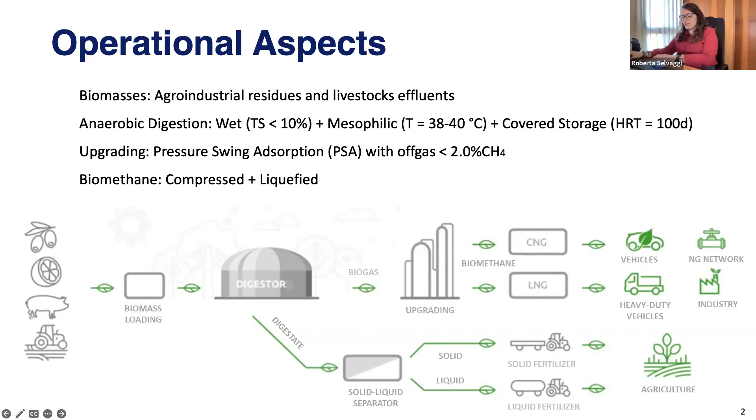So the peculiarity, the most important aspect of the Assoro Biometano plant is the diet. In our case, we don't use waste, and there is no land taken away from food or feed production. Our plant is fed only with local agro-industrial residues. And we use, for example, orange pulps, or as I show you on the screen, orange peelings obtained from orange juice production. And we also use olive pomace and wastewater obtained from the production of olive oil.

And then we also use livestock effluents, coming from poultry or chicken livestock or from pig farms. So our biomasses arrive from a radius smaller than 50 kilometers, more or less. So we can speak of a local chain. When we selected these biomasses, we had two missions.

First of all, we chose sustainable biomasses for the production of advanced biofuels in order to be in line with the European ILUC directive and Annex 9. So we respect the chain of food as first, feed as second, and energy as the last step of the chain. And the second aim was to choose something highly energetic that allows us to produce a high quality digestate with a strong and full potential of fertilization.

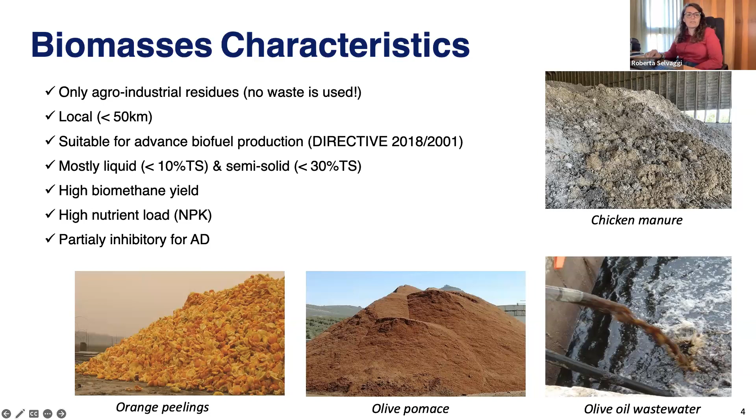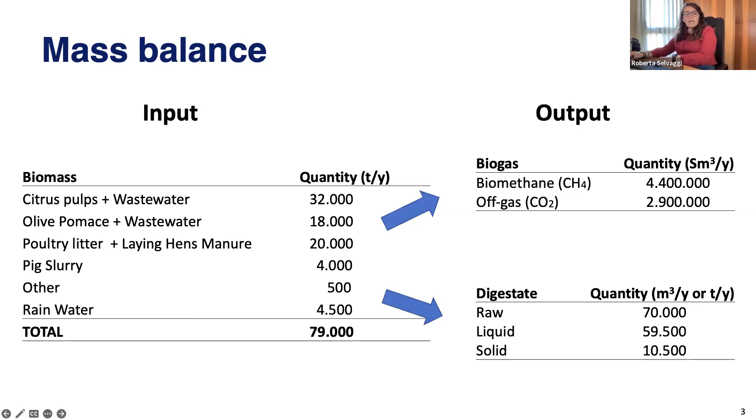So, as I already showed you, Assoro Biometano yields around 4.4 million standard cubic meters of biomethane per year. And moreover, the sales chain is also very local, like the biomass chain, because all the customers are placed within a radius smaller than 100 kilometers from our site. So again, our peculiarity is working local.

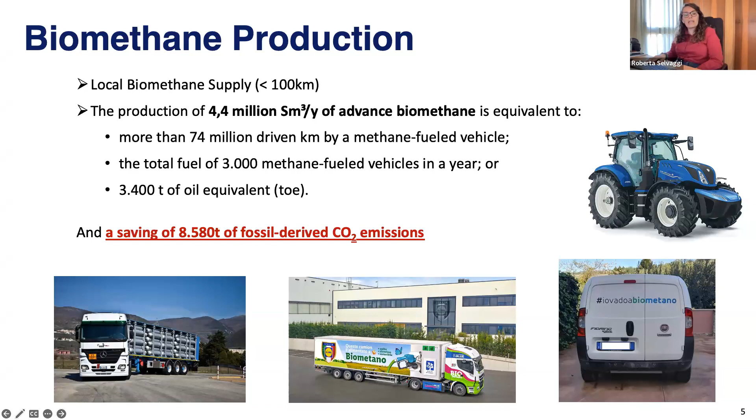With this quantity of natural gas, it is possible to travel 74 million kilometers with a household methane-fueled vehicle. And most important of all, we are saving more or less 8,600 tons of carbon emissions from fossil fuel. In other words, Assoro Biometano is yielding benefits both for the economy of the whole region and for the sustainability of the transport chain.

This is a solution with a high efficiency of distribution, because in 8 hours of work, we can spread 1,000 tons of digestate. So with this system, we spread digestate on about 50 hectares in more or less 4 days. So it is important for us.

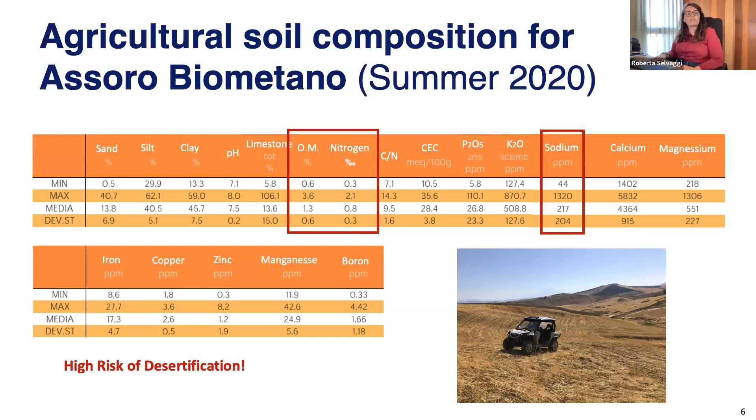And it's not all about numbers, because in addition, our digestate allowed us to reduce the need for synthetic fertilizer, to avoid the problem of odor emission when compared with effluents, and reduce the potential pathogenic content of livestock effluents. By increasing the humidity of our soil, we can also reduce the water need for irrigation.

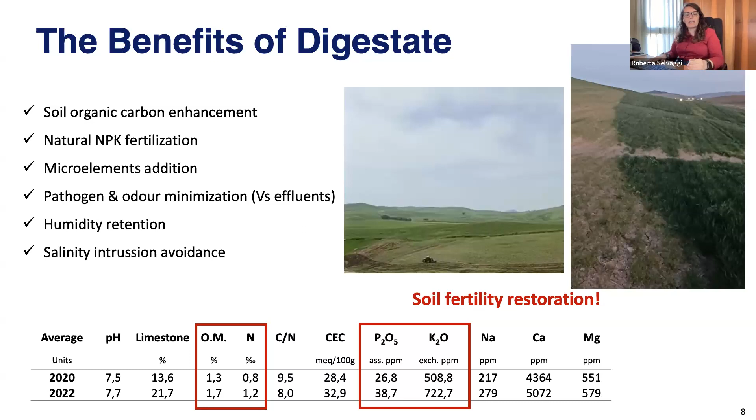So with all this, we can conclude that Assoro Biometano is working to stop the desertification process of the whole Dittaino Valley, with a strong contribution to the sustainability of the whole region.

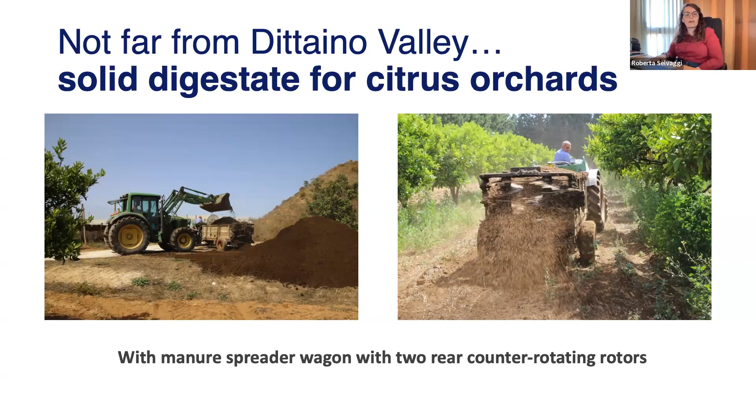So as you can see in this photograph, with the support of the University of Catania and other local stakeholders, we are doing distribution tests on citrus orchards, adapting a manure spreader. These are photographs of our experimental activities. And we are trying to find some solutions also for vineyards.

We are working on perennial crops with a high level of income, because we hope they are able and willing to pay for digestate as a product and for its transport cost. So we are testing different solutions, also to measure the efficiency of different distribution approaches.

But last but not least, I want to share with you only 2 pitches about a new research activity, the Fertimed project. Assoro Biometano is not directly involved in this project, but I'm the innovation broker of the operational group working on this project, and I would like to show you our experience. Fertimed is a Sicilian project financially supported by the Sicilia Rural Development Program, inside a measure for cooperation between private and public companies to develop innovative solutions to agricultural issues.

Fertimed involves 8 partners, 6 farms and 2 institutional teams, and they constituted an operational group named Digestato, which in Italian means digestate, with the aim to evaluate technical and economic solutions for using an innovative kind of digestate, the microfiltered digestate. And this is the rationale of the Fertimed project.

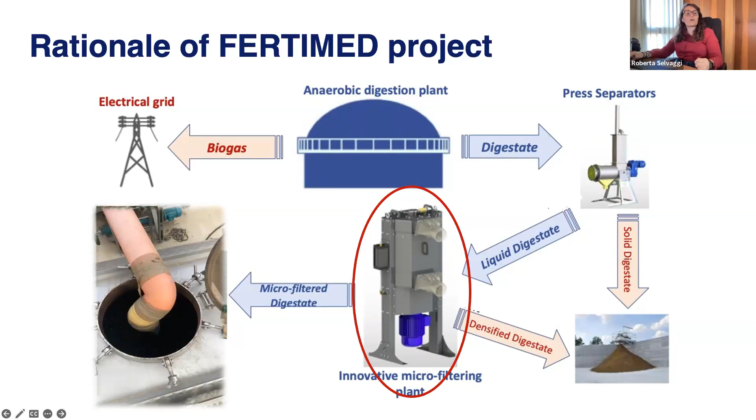The chain to produce digestate is as usual. We always have the same phases as an ordinary plant, but the innovative section is the microfiltering unit. We produce microfiltered digestate starting from the liquid fraction of the digestate. And we are using an innovative plant by VAM Sepcom, installed in a digestion plant in the province of Ragusa in Sicily. So it's another plant, not Assoro Biomethane's plant.

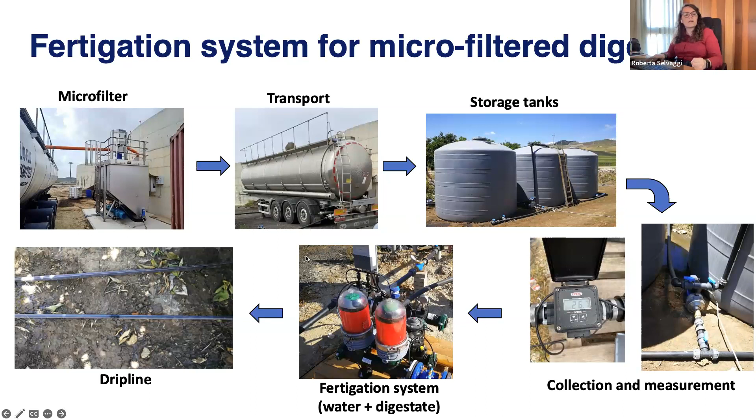Then, after production, we transport the microfiltered digestate to the partners' farms and use it in a fertigation system. After storage, we mix water and digestate in a ratio of 1 unit of digestate to 15 units of water, and use this mix in drip lines. These are photographs of our experimental fields, where we installed all these units to set up the process.

As I said before, we are trying microfiltered digestate on perennial crops typical of the Mediterranean area. So we are trying it on citrus orchards and opuntia fields, grassland. But we want to produce cladodes as biomass for the digester.

So finally, I would like to say that our mission, our company, closes the circular chain of the agricultural economy. For example, we use citrus pulps to produce biogas and digestate. We use digestate to produce citrus fruits, then obtain juice, and then citrus pulps to start the cycle again. And the same is for the opuntia: we use digestate to produce cladodes, to produce biomass for digesters. So we are a concrete example of circular economy.

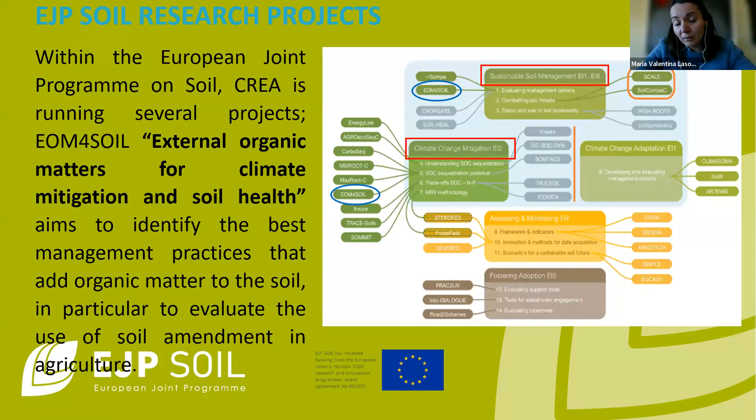In particular, today I'm talking about a new project to evaluate soil amendment in agriculture. Within the European Joint Programme on Soil, CREA is running, as you can see from the picture, several projects. In particular, today I'm talking about EOM4Soil, external organic matter for climate mitigation and soil health, which aim is to evaluate the best management practices to add organic matter to the soil, in particular to evaluate the use of soil amendments like digestate, biochar, or compost in agricultural systems.

This is the context where we are running this project. We need to consider that at European level, there are many activities which generate organic waste, so urban, industrial, agricultural activities, and the annual production of bio-waste at European level is estimated to be 1.6 billion tons, which can be divided between 61% waste produced by animal breeding, 25% originated from plant residues, a small part, 7%, industrial waste, and another 7% municipal waste.

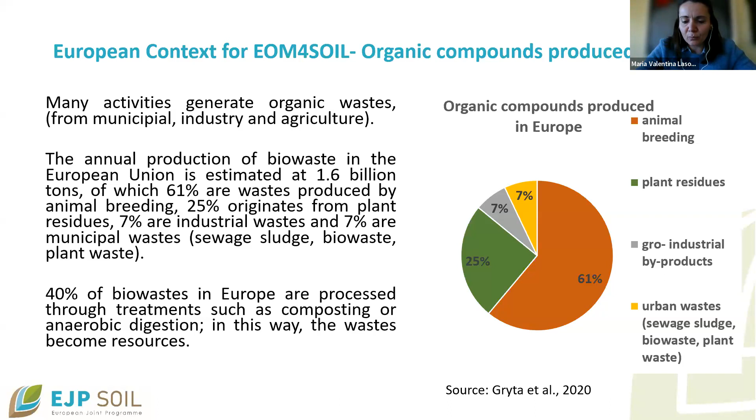From this estimation, so 1.6 billion, just 40% of waste in Europe is processed for treatment such as composting or anaerobic digestion, and in this way, waste becomes a resource, a soil amendment to increase the soil organic matter. The project is a 3-year Horizon 2020 project, which involves a big consortium of partners from the European Union, but there are also 2 countries from outside the area, Switzerland and Turkey.

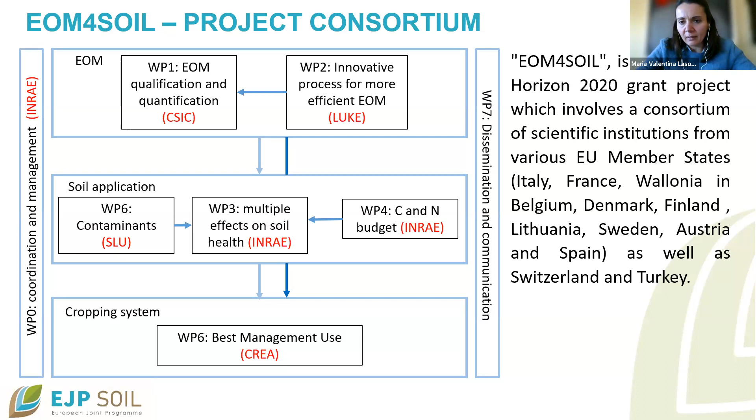And the project is divided in three main parts. The first one is about the selection, characterization, qualification, and quantification of EOM at member state level, then the effect of EOM application on the soil, and another part is about the legislation, national and European, and the policy recommendation for the best use of soil.

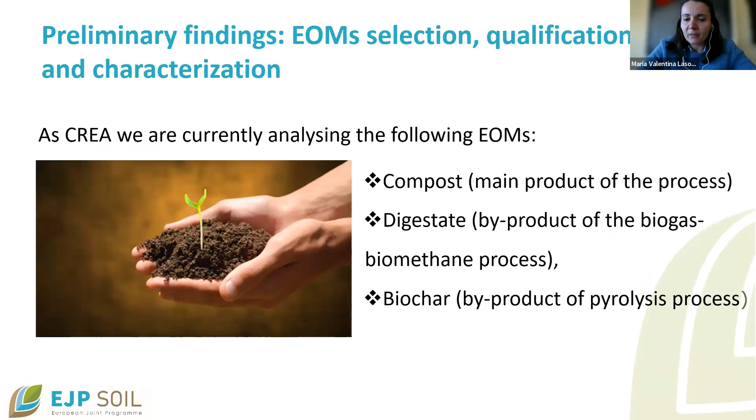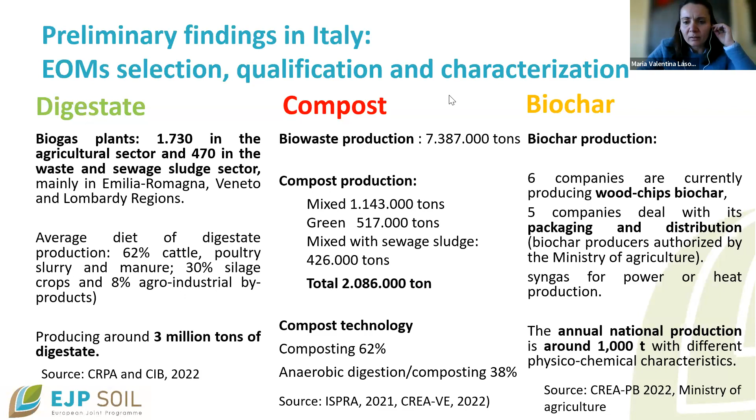So coming to the end, today we are working on the European policy framework, to understand the EOM production market and the use of EOM at European level. We are collecting information from member states and also in Italy about different regulations and related restrictions and territorial compliance like the Nitrate Directive and Water Directive, all related to the evaluation of the application of EOM at European and national level.

So coming to the end of the presentation, we are work in progress. To summarize, we are working to answer the following questions. What are the most promising and suitable types of EOM, and which are the available amounts for application to the soil at European level? Which are the conditions that make EOM application and production suitable from an economic, environmental, and social point of view? And of course, we are working on the European policy framework in relation to the application, to define some policy recommendations for our policymakers.

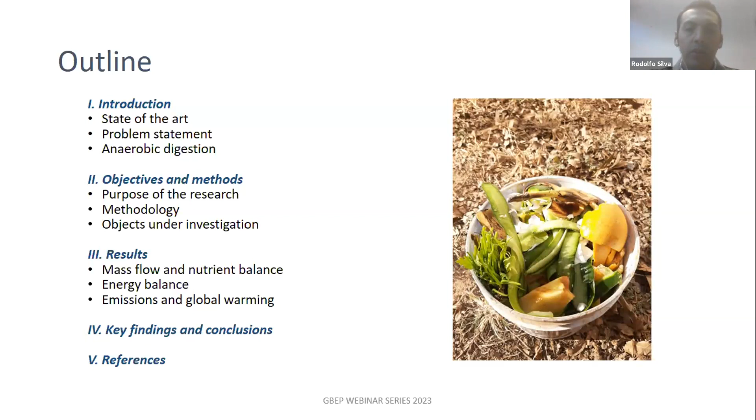So first of all, to put a framework of the situation in Brazil about organic fraction and anaerobic digestion: these technologies already exist in Brazil, but they are still a long way to suffice the waste treatment, fertilizer, and energy needs. The organic fraction and also other organic residues are until now a pollution source and still not sufficiently recognized as a valuable resource. So there's still a lot to be done.

Specifically talking about the technology of high solid anaerobic digestion, it is already seen as a promising alternative, and a few remarkable projects have been developed in the country. Some researchers and policymakers are already paying attention specifically to this technology, and the applicability of high solid anaerobic digestion technologies still remains to be demonstrated, which is one of the purposes of this research.

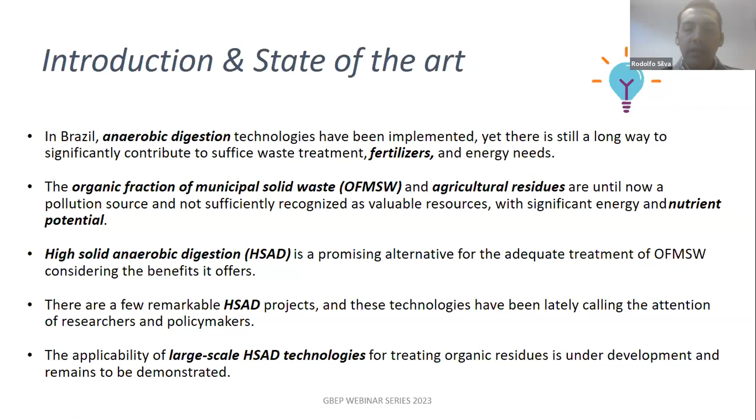So in general aspects, why do we need these technologies? What is the problem to be solved? And I want to put some emphasis in this, considering that anaerobic digestion is many times seen as a biogas source and we put too much attention into biogas and producing energy, but we have to try to change the chip a little bit and think about anaerobic digestion as a way of treating the waste as a main purpose.

Other problems that this technology tackles are water scarcity, and also the continuing increase of energy consumption in the country, and of course the supply of large amounts of artificial fertilizers and soil erosion, which is a big problem not just in Brazil but all over the world, and the dependence on fossil fuels and large greenhouse gas emissions, and of course linear economic practices.

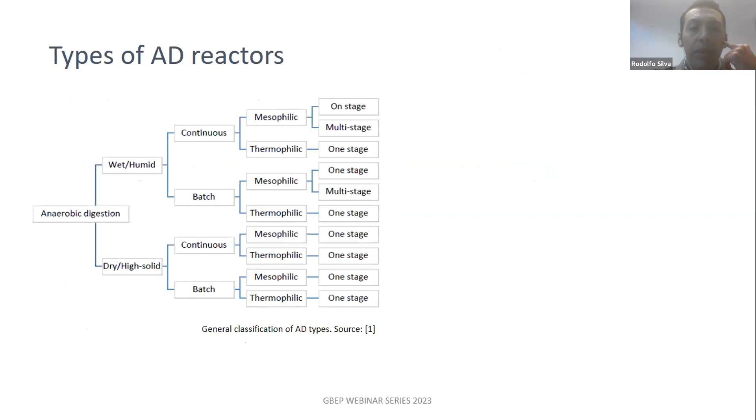So, in this diagram, we can see an overview of the different types of anaerobic digestion reactors. Some of you may be familiar with some of them or with all of them. I want to show you this so you have a general idea of what we're going to be focusing on, which is these two technologies. We did this comparison of a one-stage wet anaerobic digester and also a one-stage mesophilic dry anaerobic digester.

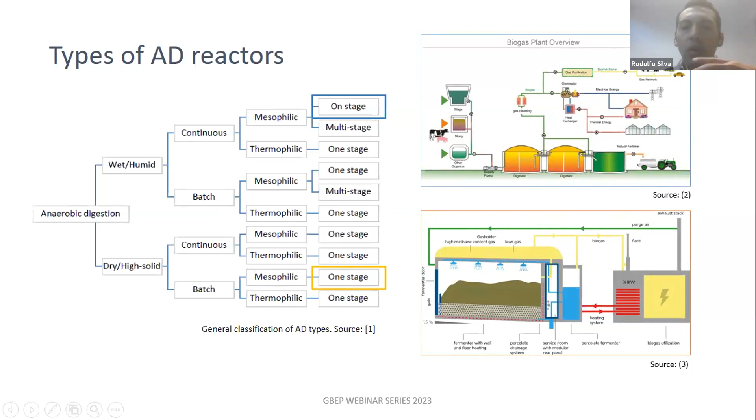So these schemes show very roughly, so you have an idea, how simple or how complex these systems are. And when we started this research, we had the theory that high solids anaerobic digestion could be a more promising technology for the case in Brazil.

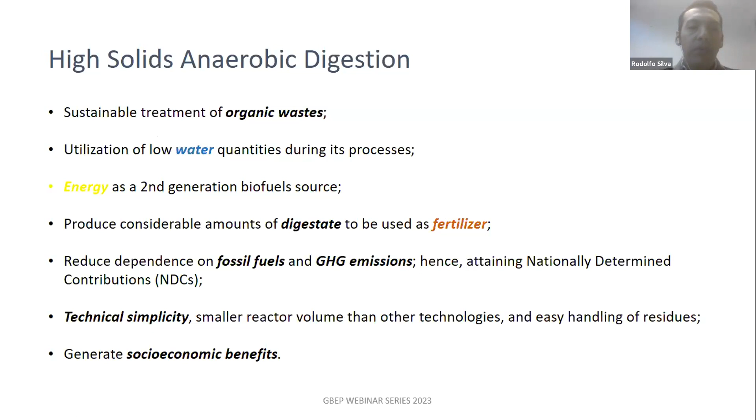And with this in mind, we tried to recognize the advantages of this technology. And as I mentioned before, the importance of organic waste treatment as a first step. Also considering that this technology helps to save some water in the processes, also producing some energy as a second generation biofuel, and producing some digestate as well, of course, as a fertilizer.

These three units take us to the nexus approach, which we are considering, and it's very important. We take the decisions and we see these systems in a nexus approach, not just in the case of water, energy, and food, but there are also other nexus, for example, water, waste, and soil. So we have to take decisions considering holistic perspectives.

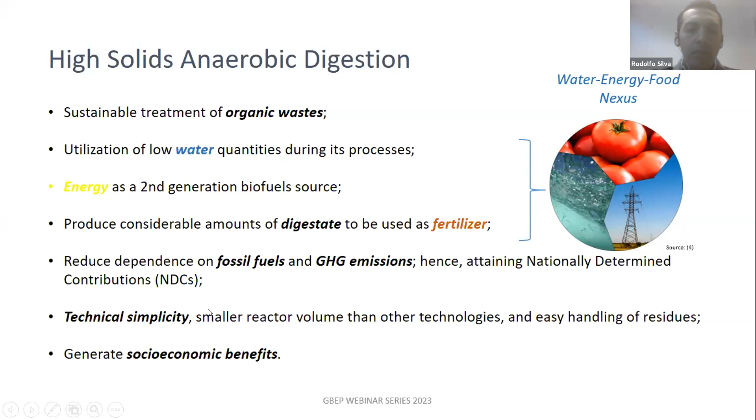Also, another advantage of anaerobic digestion or dry anaerobic digestion is that it reduces, of course, the dependence on fossil fuels and reduces the emissions of greenhouse gases, and technical simplicity. So it can tolerate large amounts of impurities, and also, of course, some socioeconomic benefits.

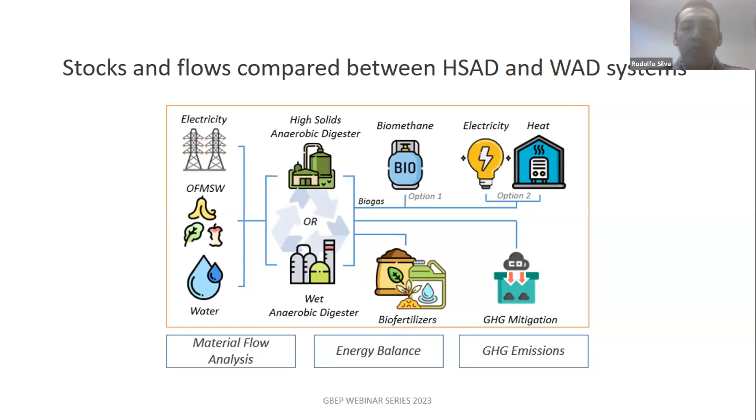So starting a bit more deep into the case study, this diagram shows in a very general way what we did. We did a comparison of two technologies, high solids and wet anaerobic digestion. And we compared the material flow, the energy balance, and the greenhouse gas emissions. Of course, these two technologies can produce biogas. The biogas could be turned either into biomethane or electricity and heat. And they produce biofertilizers and mitigate greenhouse gases.

So the general purpose of this research was to identify the benefits and disadvantages of both technologies, trying to be as objective as we could. So even though, as I mentioned, we started with the theory that high solids could be a better technology, we wanted to be very objective to have reliable results.

And we did a comparison on the effects of water savings, waste management, nutrient recycling, energy surplus, and the mitigation of greenhouse gases. And as I mentioned, the way was considering two case studies, existing treatment plants, one in southern Brazil and the other one in Rio de Janeiro. I'll be talking a bit more about that.

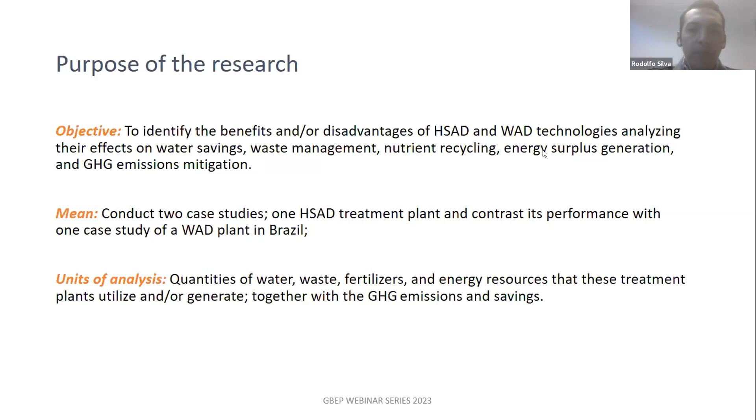And speaking more about the methodology used, we collected data from primary and secondary sources. So through interviews and questionnaires, we received some files from both companies. We also searched for articles or papers on the internet, everything that could talk about these two plants, to obtain as much information so we could have the life cycle inventory, considering all the inputs and outputs of both systems.

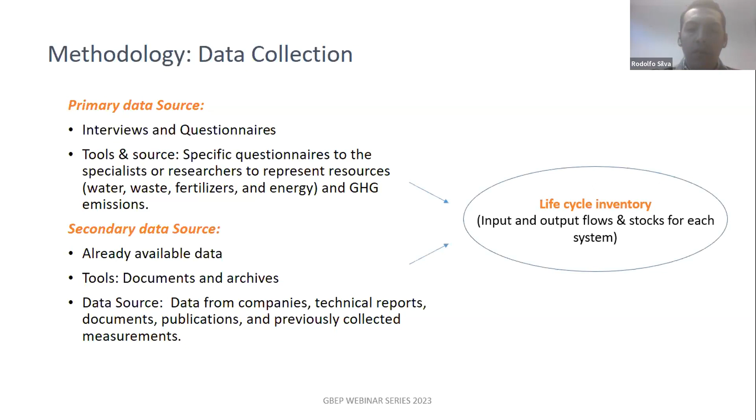So the impact categories we analyzed were mass flow, the energy balance, and the greenhouse gas emission mitigation. In order to compare fairly the two technologies, we analyzed the energy ratio and the CO2 savings ratio. So we considered the inputs and outputs of water, organic materials, energy, and also the greenhouse gas emissions as outputs. And of course, putting some emphasis on the digestate that could be produced. Sorry.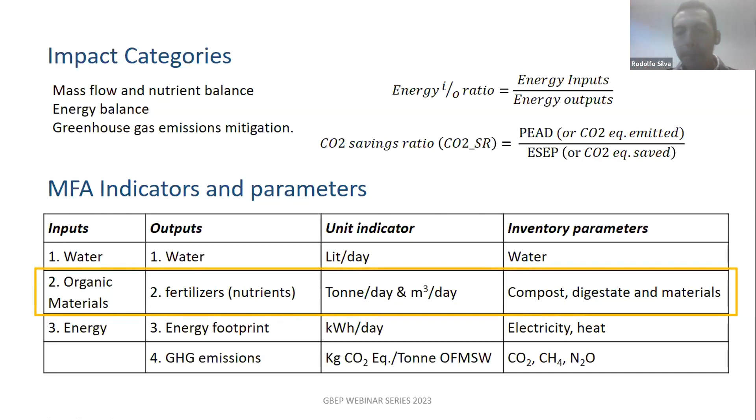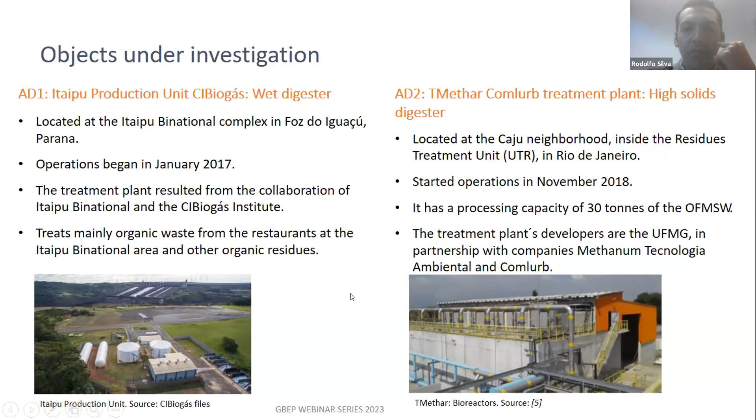So these are the treatment plants we analyzed. The wet digester is a treatment plant built in 2017 in Foz do Iguaçu in southern Brazil. And the dry anaerobic digester is a treatment plant that started operations about 2 years after the wet plant, and is built in Rio de Janeiro, in the neighborhood of Caju. And both treatment plants already manage the organic fraction of municipal solid waste. So here are some pictures of the treatment plant in Foz do Iguaçu, so you can have a general idea.

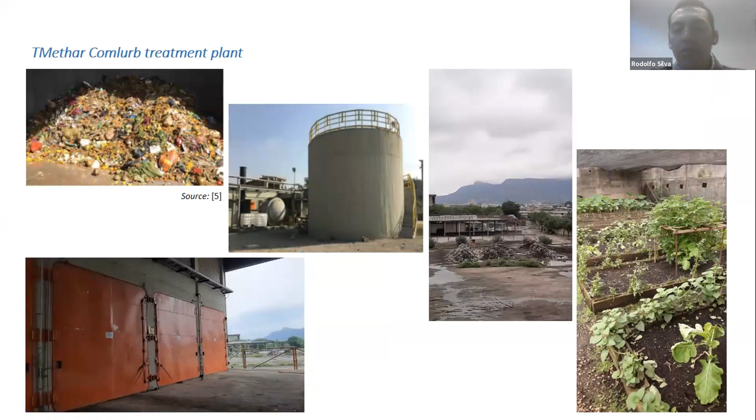Also here is the other treatment plant, the dry anaerobic digester. Here you can see a picture of how the residues arrive at the plant and how they are stored in these garage type digesters. And then they are put into these composting rows and they are turned into fertilizer, as you can see in the last picture.

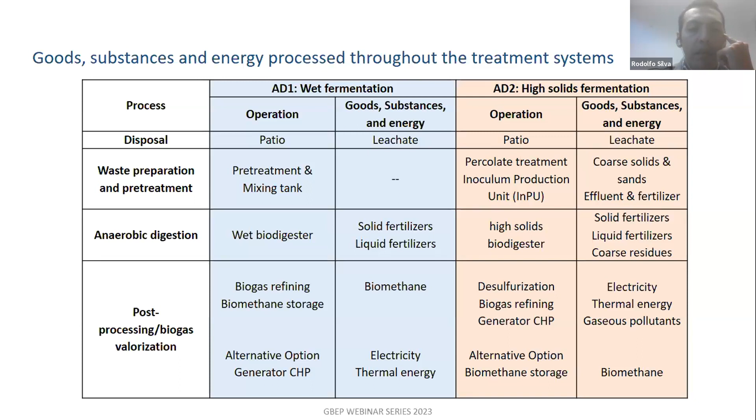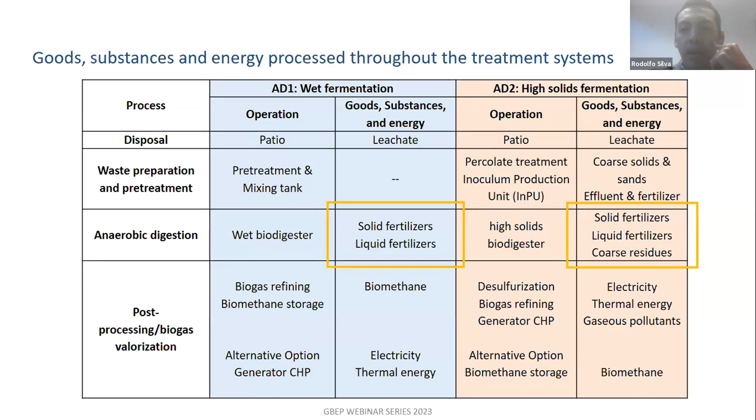So this table shows in general the processes that take place in both plants. So where the waste is disposed and prepared or pre-treated, the anaerobic digestion process itself, and the post-processing. I want to emphasize that both technologies produce solid and liquid fertilizers, with the dry anaerobic digester producing also some extra residues of water and solid waste.

Okay, speaking a bit more on the results of the research. In this diagram, you can see in a very general way the results considering the mass flow and nutrient balance. We have an input of about 15,000 kilograms per day of organic fraction in the high solids anaerobic digester. In the case of the wet, it's just 550. We normalized these two quantities in order to be comparable, considering the hypothetical case that both plants would treat 1 ton of organic waste per day.

And the results show that the high solids digester produces about 23% of solid biofertilizers. In the case of the wet, it produces 10%. However, from the outputs of this treatment plant, 74% turns into liquid biofertilizer. In the case of the high solids, it's just 2%.

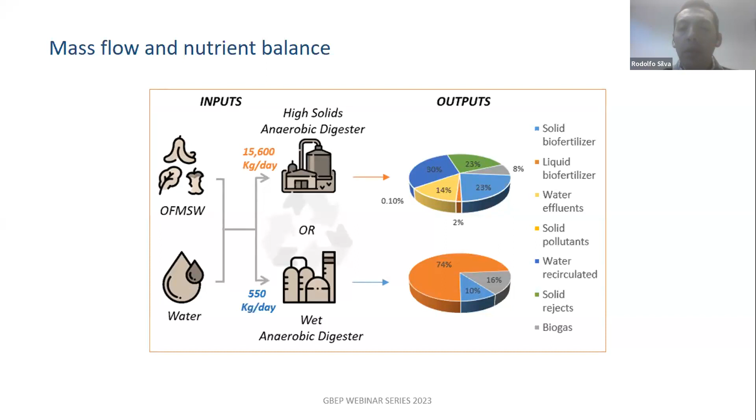Both treatment plants also convert this mass into biogas, of course, and in the case of the wet treatment plant, 16% of the output is turned into biogas, and for the high solids it is 8%. The high solids anaerobic digester also produces some other effluents such as water or solid pollutants, and 30% of the liquid is recirculated in the treatment plant itself.

So the water consumption, as we had a theory since the beginning, the dry anaerobic digester is more efficient, of course, because no extra water is added to the process. Even though the wet anaerobic digester does not utilize large amounts, just approximately 50 liters per day.

The solid biofertilizers situation is that the dry anaerobic digester produces almost 2.5 times more digestate than the wet treatment plant. And also in the wet treatment plant, as I mentioned, 74% turns into liquid fertilizer. And in the case of the dry treatment plant, just 1.5% approximately.

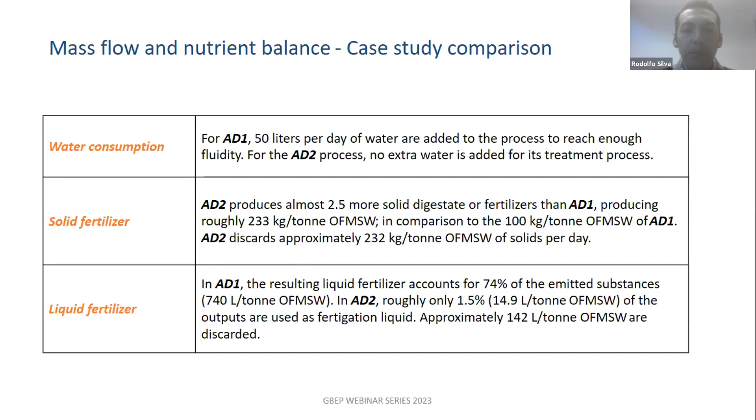Also, to mention the energy and greenhouse gas mitigation potential, we realized that the wet anaerobic digester produces a bit more than 5 times more biogas. However, when we compare the energy input and output ratio to determine their efficiency, we realize that for the dry anaerobic digester, only 26% of the energy produced is utilized for internal use. In the case of the wet treatment plant, 68%. So that's quite large. Almost 70% of the energy produced is used internally.

In the case of the greenhouse gas emissions, the dry anaerobic digester also emits less greenhouse gases, about 14% less. However, the wet treatment plant can save much more greenhouse gases, considering all the biogas it produces, right? So it's about, I think, 5 times more.

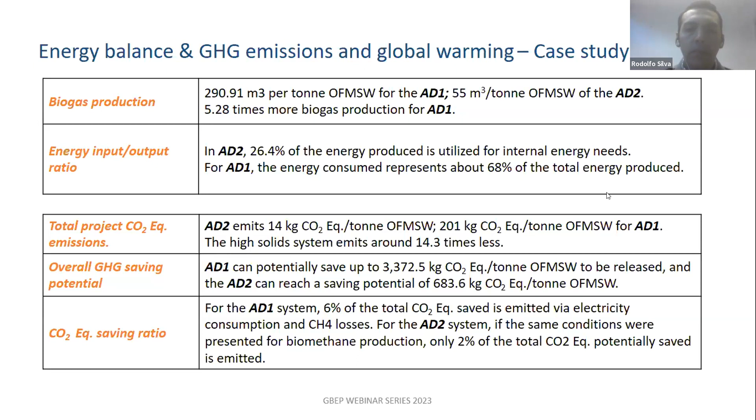So just giving the key findings and conclusions of the research, we proved that the high solids system utilizes less water in its processes, and it also produces almost 2.5 times more solid digestate or fertilizers. The wet treatment plant produces, of course, more liquid fertilizers. This treatment plant produces more biogas, about 5 times more.

But considering the efficiency, the high solid anaerobic digester plant becomes more efficient because it consumes less energy in the internal processes than the wet system. And also, the high solid anaerobic digester is more efficient in terms of greenhouse gas emissions.

And as a general conclusion, I want to highlight that both technologies have their advantages and disadvantages. Considering the digestate, both technologies can generate considerable amounts of solid and liquid fertilizers, which contributes to achieving the circularity of the process, food security, and sustainable agricultural practices. So it's very relevant that we take more into account the importance of digestate and fertilizers, and not put too much attention into biogas, which is also important, of course. But we have to look more into digestate and fertilizers.